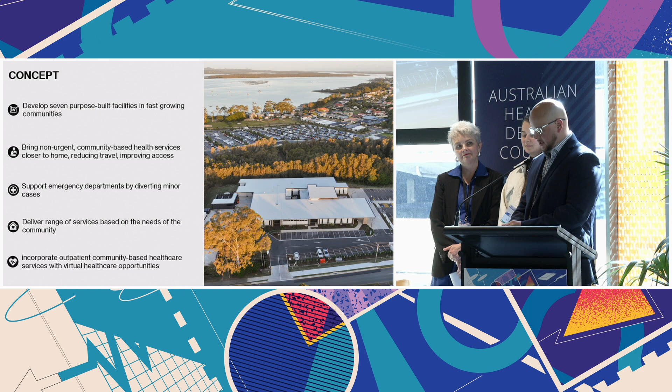Satellite Health Centres was originally a 2021 state budget announcement of the previous government, formally announced as a satellite hospital program, ultimately to deliver a series of ambulatory facilities to ease the burden on existing acute care hospital facilities across southeast Queensland. The program sought to roll out ambulatory facilities in growing communities, locate them close to home, reduce pressure on emergency departments through diversion of lower complexity presentations, align service offerings to those communities, and where possible embrace opportunities to integrate outpatient community-based healthcare and virtual care models.

So, as stated in the previous slide, the satellite health centres are an expansion of healthcare services. At a high level, they provided local communities with minor injury and illness clinics, medical imaging and diagnostics, and additional referral-based outpatient services. We'll go into more detail about the service mix later in the presentation.

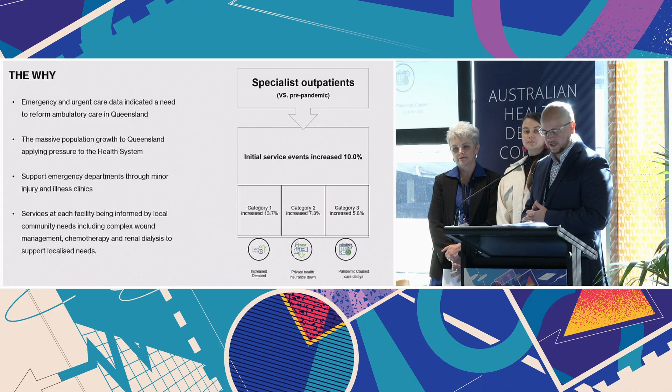So on this basis, it required a complex ecosystem in order to roll out the projects, and multi-agency engagement was essential.

To touch on a couple of points here, the program board was established by Queensland Health and included Queensland Treasury, Premier and Cabinet, Public Works, State Development, and the 4 hospital and health services, in order to oversee the planning and delivery of the program and the specifics of the projects themselves.

There was also an interagency working group set up for cross-government coordination with those same agencies, particularly because of the accelerated nature of the requirements.

To give an idea, land searches, selections and transactions had to be completed in weeks rather than months. Planning approvals under ministerial infrastructure designations, a process which in many instances could take up to a year, were required to be completed in months.

And business case development, design, cost modelling, and program-level managing contractor engagement were also required to be undertaken concurrently while the sites and planning approvals were being locked down.

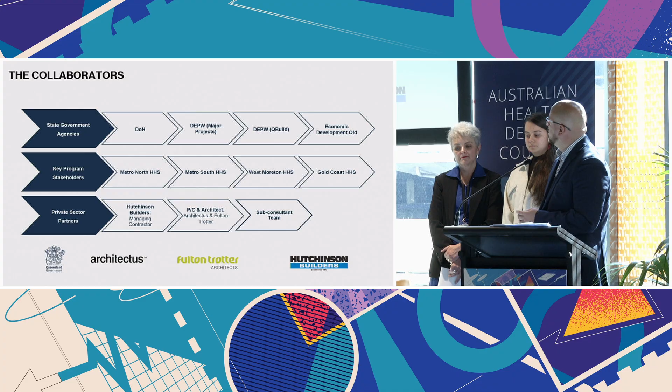So I'm going to talk a little bit about the locations. All 7 centres were located in southeast Queensland, an area of huge population growth. The locations were across 4 hospital and health services, as Todd mentioned, and across various traditional owner groups — the Kabi people to the north, and the Turrbal and Jagera people to the south. The communities and cohorts these centres are located in are all quite different.

So this is probably a good time to talk about the brief. Being a program of work, the brief was for a high degree of standardisation — these facilities are all going to be the same. So we've got some common themes with the previous presentation. But because of differences in the HHSs, the locations, and the communities they serve, they were also necessarily different. And as we talk more about the outcomes, you'll see these facilities are the same but different.

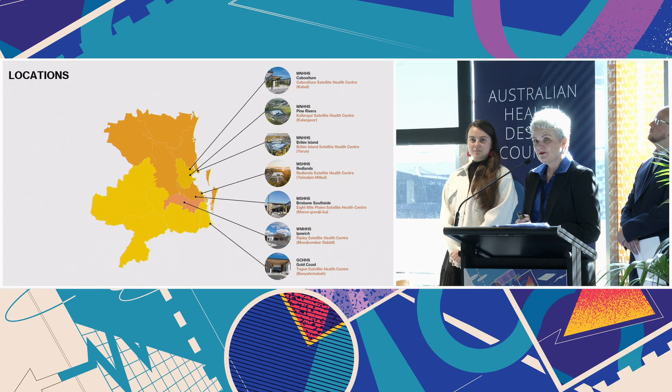In terms of the locations, one of the key things was that they had to be located in proximity to the major hospitals. Being satellite centres, they're linked very closely to major hospitals, and with some of our facilities, they're actually linked to a couple of major hospitals. This really informed the service offerings at each of the centres, and as we got into the detailed design, it also resulted in differences in how the same service might function in each of the centres.

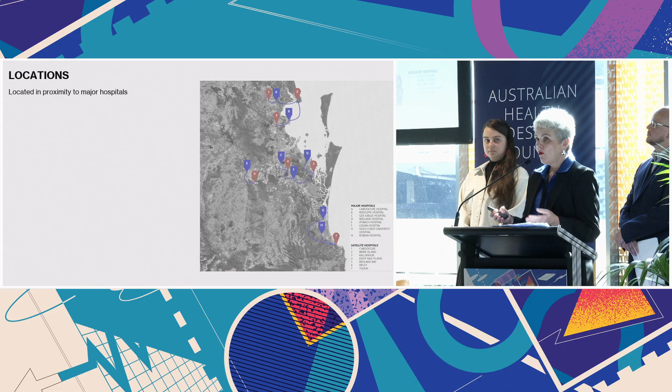In terms of the communities, it's probably worth outlining a little bit more about the differences. One of our facilities is located at Bribie Island, which is a very popular retirement destination, so it has an older cohort and community. Another facility is located at Ripley, in the west out towards Ipswich. This is a newly developed area with affordable housing that attracts young families. Our Redlands facility services the mainland Redlands community, but also the Moreton Bay Island community. So all quite different cohorts and communities with different requirements.

Continuing on with the theme of same but different, as Todd mentioned, this program happened really fast, so we were undertaking land acquisition at the same time as the business case and concept design. We undertook many test fits on multiple sites, but these are the 7 sites where the facilities have been delivered. As you can see, they're all quite different in their configuration, and they all have quite different contexts. They're all in the suburbs.

That was a key part of the satellite program, but they're quite different suburban contexts. They have all the same elements, all the same puzzle pieces, but the puzzle pieces all fit quite differently in terms of the site planning. They all have a similar facility, same number of car parks, similar plant, but access to the site is quite different. Some of the sites are flat in terms of topography, some have very significant slopes of 14 metres across the site. They all have different proximity to things like creeks, train stations, airports, cliff faces. So there were all sorts of site challenges that had to be reflected in the site planning.

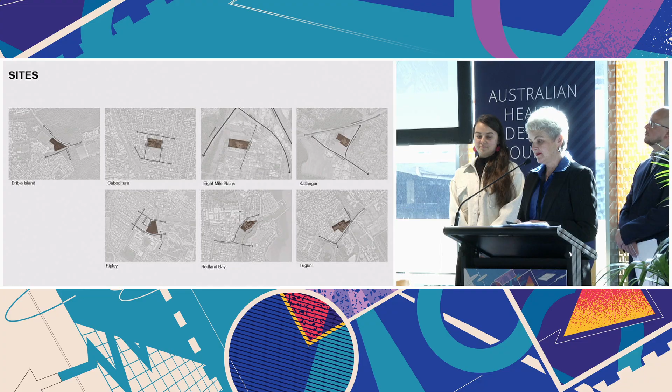With that fast program, we had to have a really clear structure of how we were going to drive that consistency across the program, but also respond to the differences across each of the sites. Decisions had to be made really quickly. So we had a regular cadence of meetings, with executive user group meetings attended by all 4 HHSs as well as HIQ and Public Works Department. The design team had a key role in attending all of those to ensure that consistency agreed on at that EUG level flowed down to the project user group meetings that occurred with each HHS quite separately.

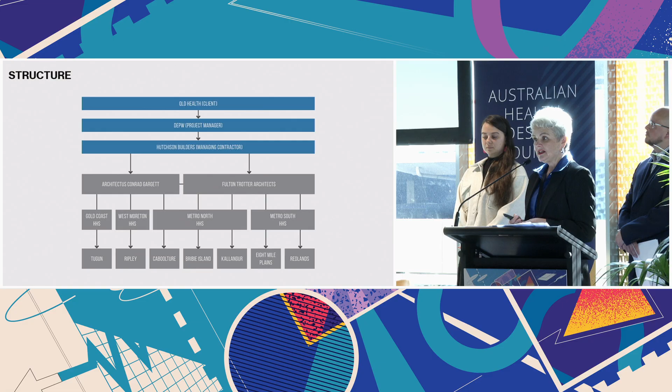The design team had a site lead for each of the sites, which is where we really drilled down into that detailed design with the clinicians at each of the major hospitals and within each of the HHSs. This flowed through to the health service offerings. The government election commitment was to deliver minor injury and illness clinics and outpatient services across all 7 centres, and this also involved medical imaging across all 7 sites. But then there were different health service offerings depending on the HHS needs and the major hospitals. In some cases, it was medical day, offering chemotherapy and infusions. In others, it was renal services or oral health.

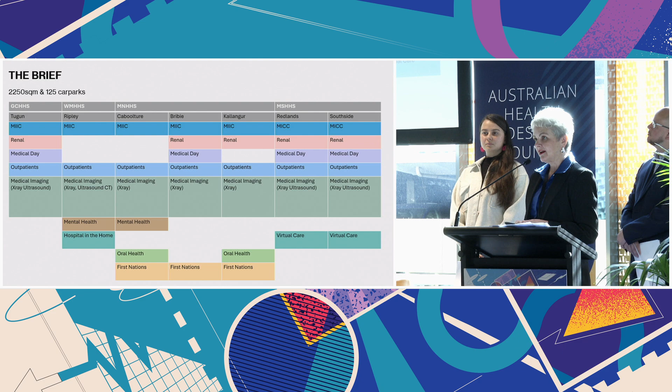This matrix gives you a pretty good idea of the different mix across the 7 centres. In terms of being the same, they all had the very same compact GFA of 2,250 square metres. But within that space, we were delivering different service offerings. You'll see in the blue there, they all had the minor injuries and outpatients, medical imaging, but then they had quite a different mix. No 2 centres were exactly the same, and even within each of those services, there were slight differences. So some services had renal chairs of 12 and others 9. Subtle differences the whole way along.

Okay, so while we didn't have the budget of any Saudi princes on this project, we absolutely did go into it with the idea of creating value with what we had. Something that was really important to us was to create a community space, and our aspiration and concept really revolved around that idea of community.

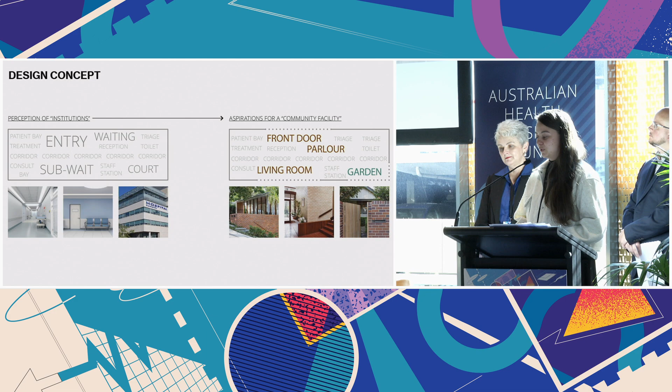We had guiding principles themed around journey, nature, community focus, and local context, and through that we had key strategies. These were important because we were designing across multiple architecture firms with many different stakeholders, with a builder as the client, and that allowed us to have alignment on the key outcomes. The concept of removing the perception of an institutionalised space came up a lot, focusing on the idea of a community facility, the front door, the journey through the building, and creating a living room feeling throughout the spaces.

So nothing groundbreaking or new here for probably most of you in the room. However, these were really simple diagrams we could keep coming back to, and whenever things were up for discussion or debate, we were always able to return to these design keys. Some of the key ones there are around the central courtyards.

All 7 sites ended up with a central courtyard with different functions in the end. We have a concept of warm handovers, something really important that we were able to fight for throughout the whole process, and we'll go through the outcome shortly. We also had keys around our form and envelope, so the H-plan, allowing light into the spaces, and the idea of local materiality and conceptual references.

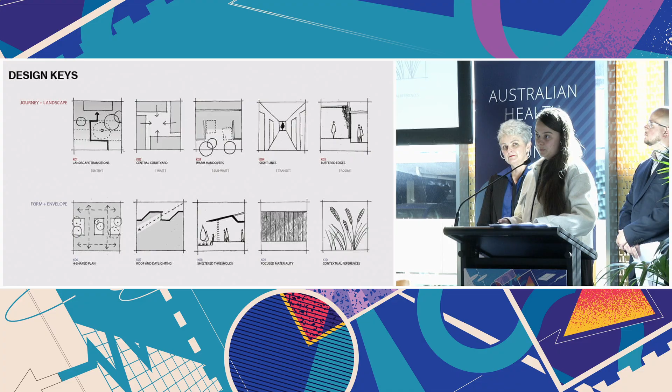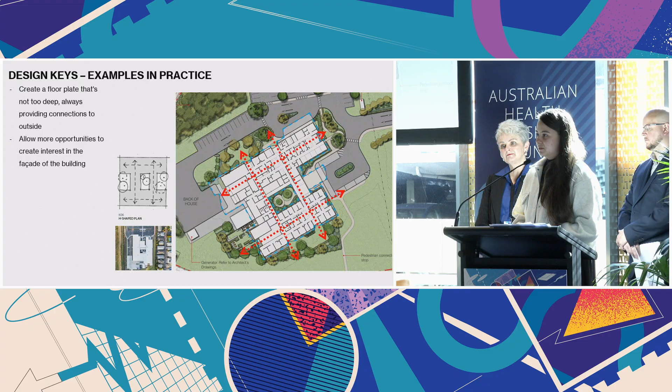Landscape design was done by Dun & Moran Landscape, so they were a really important part of the process as well. The H-plan, in practice, is nothing new, but surprisingly very important to keep coming back to as a key we wanted throughout the whole project. By not having a floor plate that's too deep, we're always ensuring connection to outside and to natural light, which we all know is really important. It also allowed for a little more interest in the facade, with some depth to it.

In practice, the sub-waits were our warm handovers, again a design key from early on that we were able to keep bringing back to its importance. This meant reducing large waiting areas into warm handovers, alluding to that Disney model with a bit of distraction through views outside and materiality, making you feel like you're in more of a living room than an institutionalised space.

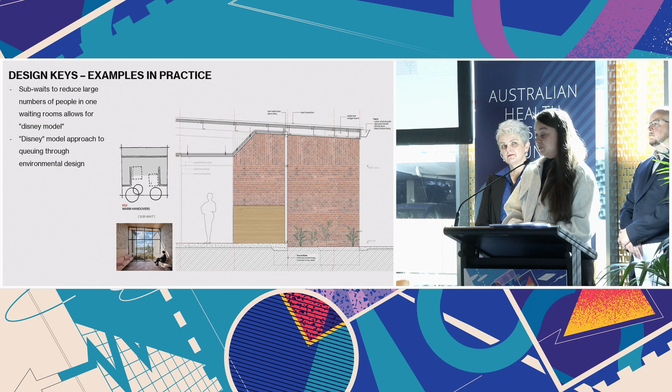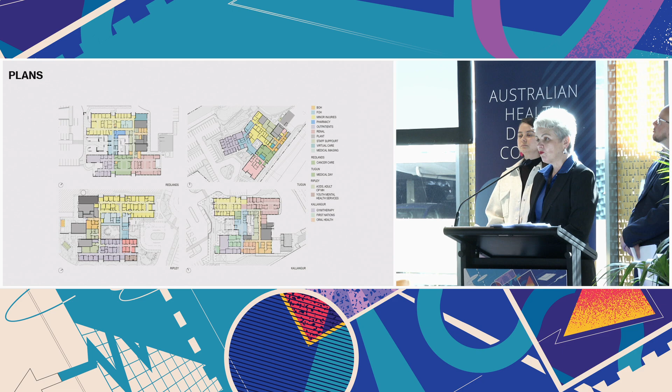Building a bit more on the H-plan idea, we had an H-plan at all of the centres, and the patient journey was remarkably similar across all 7 centres: patients arriving at the car park, entering a beautifully landscaped shaded entry courtyard, arriving at the front of house waiting reception area, and then being directed to clinical services in each wing of the H-plan, with a courtyard behind reception and back of house behind that. The H-plan was very effective for efficient circulation — with our very compact GFA, we tried to maximize clinical space and be as clever as we could with circulation. It was also effective for wayfinding, with no area very far from that front of house space.

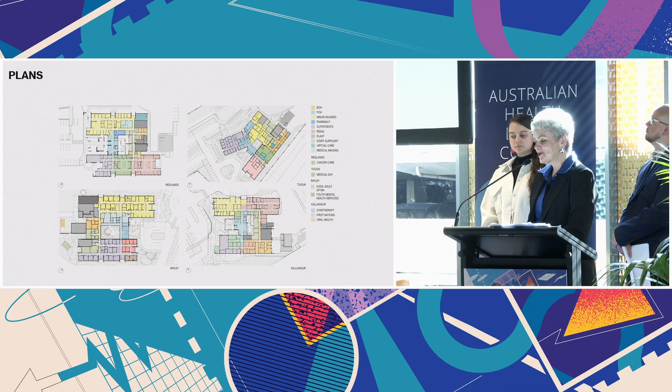You'll see these are 4 of the H-plans from 4 of our sites, and there are necessarily some differences — the different health services led to variations in the H-plan, as did the actual site planning. In particular, Tugun in the top right-hand side: the configuration of the site meant we had to crank one arm of the H-plan, so same but different.

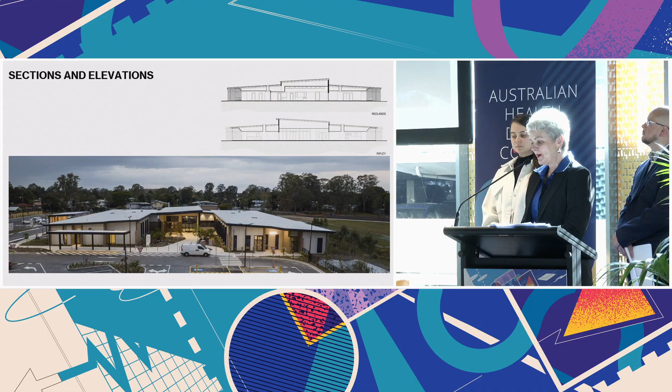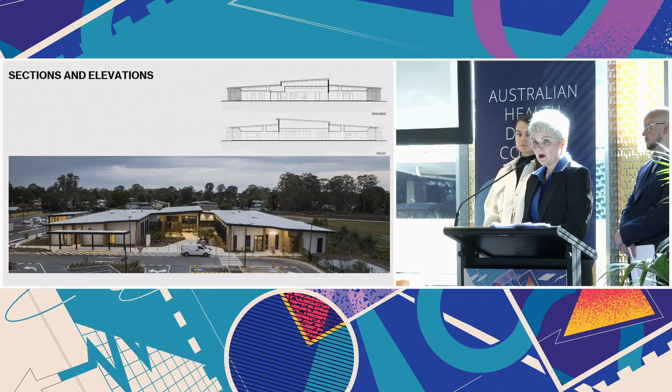I'm not going to spend too long on this one, but in terms of the built form, very simple structures to help us manage budget. Single level, simple skillion roof, which settled really well into the suburban context. We also brought in suburban materials, brickwork and timber, which fitted well with the surrounding residential development.

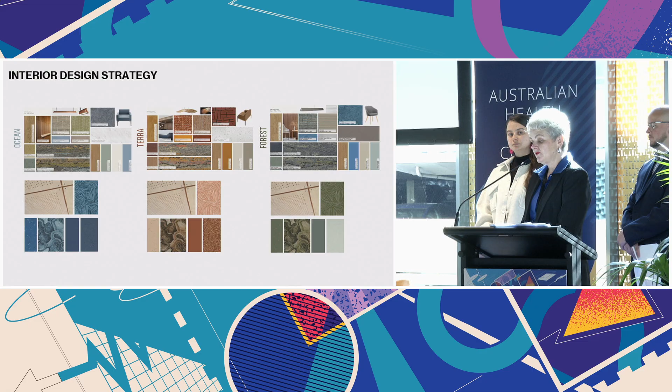In terms of our interior design strategy, we had the same palette of materials across all 7 sites. I've already mentioned the warmth of the face brickwork and timber, reinforcing that non-clinical feel. But then we had a different colour palette depending on where the centres were located. You can see the 3 different schemes selected for the 7 centres depending on whether they're near the ocean or the bush.

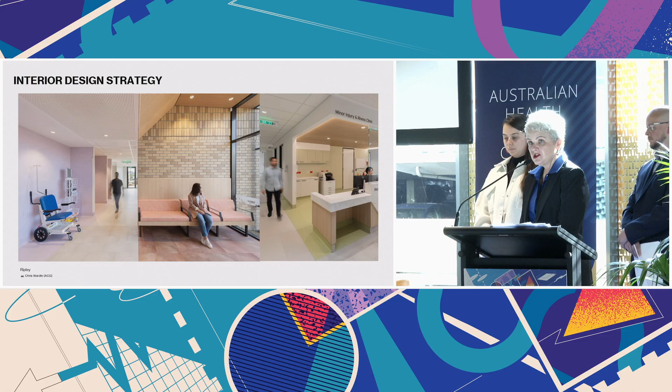You'll see some images here. One of our design strategies was to really have the flow of the outdoors indoors, connecting the landscaping to the interiors, with materials flowing from outside to inside. That's one of the warm handover waiting areas in the centre, with brickwork and timber flowing through. We also had different colours for the different health service areas to support wayfinding, with timber portals as you transition from one health service to another.

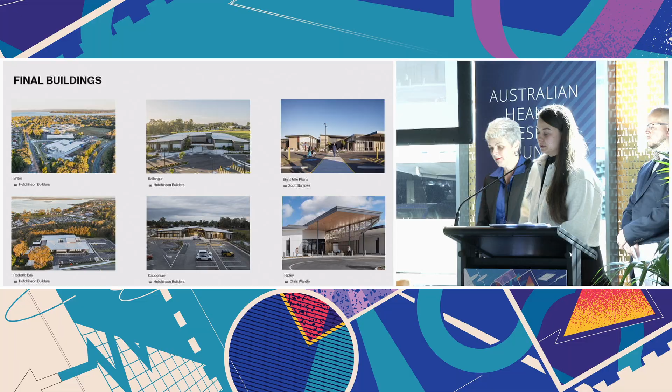Just a quick snapshot of the final buildings, 6 of them. We're really just trying to illustrate that they are community facilities, embedded within quite a suburban environment. This is showing you that the scale is very low compared to perhaps what you might have originally thought when you heard about it being called a sort of satellite hospital, which it isn't. So really just trying to show the scale and the simplicity.

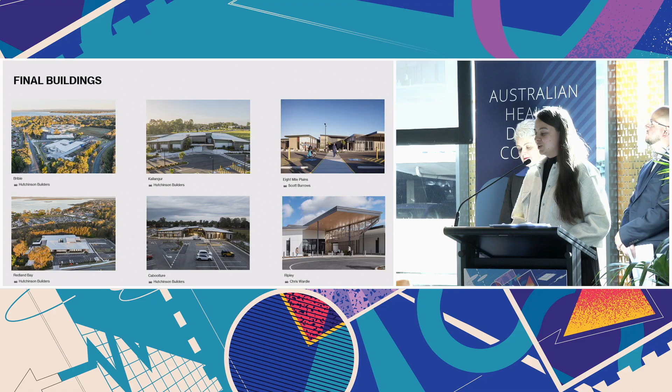You get the idea of how they are all similar, trying to make it feel a lot more welcoming than a large space. Looking through the interiors, again these are the 6 different sites, so you can start to see how similar materials are used throughout similar spaces, with slightly different colour variations and application of material as well.

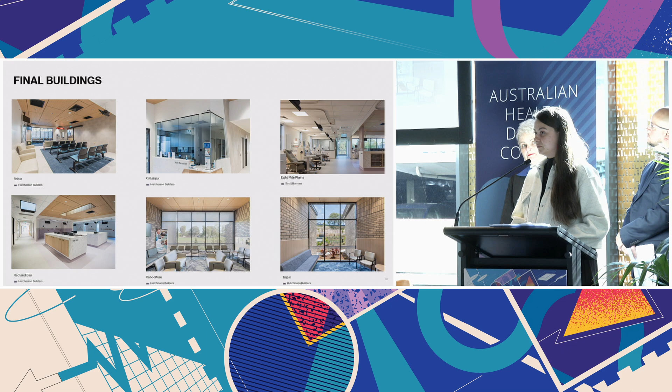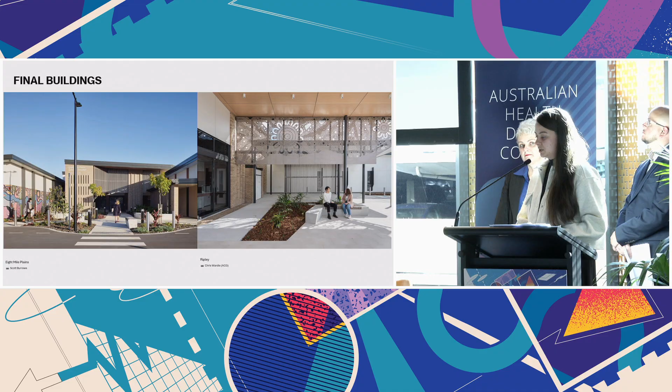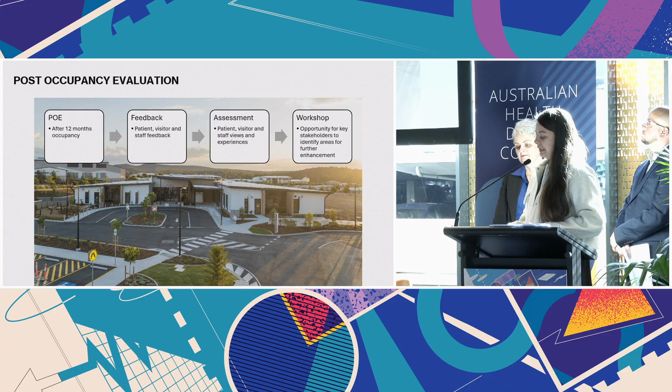Now, post-occupancy evaluation. This is Dr. Wai's work, so if you have questions, hold them for her later—I'm sure she will be more than happy to talk to you about it in great detail. But I will touch on some of the findings. Architectus collaborated with West Moreton Hospital and Health Service to conduct a POE 12 months after occupancy. The main purpose was to gain feedback through specific questions, and then an assessment of the patient, visitor and staff views and experiences was undertaken, as well as a workshop which created an opportunity for key stakeholders to identify areas for further enhancements. A really important part of the process.

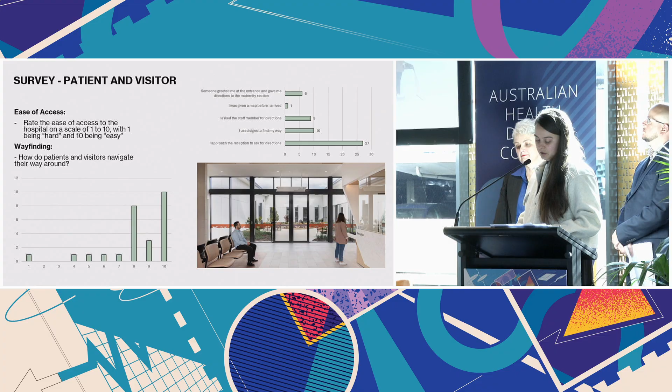I'm just going to touch on a couple of questions, which hopefully relate to some of the things we mentioned earlier. Through the patient and visitor survey, with around 32 participants, they were asked a series of questions, one of which asked them to rate the ease of access to the hospital on a scale of 1 to 10, with 1 being hard and 10 being easy. The majority of people, as you can see in that bar graph at the bottom, found it pretty easy to navigate to the site. I just called it a hospital—it's not a hospital.

So that's really good, kind of obvious they're built within the community, so probably nothing too unexpected there. When asked how patients and visitors navigate their way around, the majority of respondents would approach the reception desk before moving on to where they needed to be in the space.

The spaces were designed that way, so that also makes a lot of sense. Secondary to approaching reception, they would then move on to using the signage throughout the building to find their way around, and then the waiting areas and interior of the space—really trying to understand the perception of the interior environment.

We spoke a lot about creating a warm, welcoming environment, so did we actually do that, or is that just something we like to talk about? Turns out that the majority of respondents actually did express contentment with the aesthetics, specifically appreciating the view to outside—that was a really important response we collected. 78% of respondents felt that the colour and design of the space made them feel comfortable. Have a chat with Wai later, I'm sure she'll be happy to go through more of that.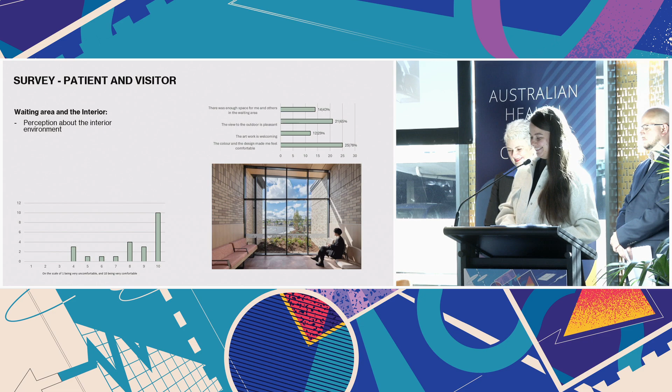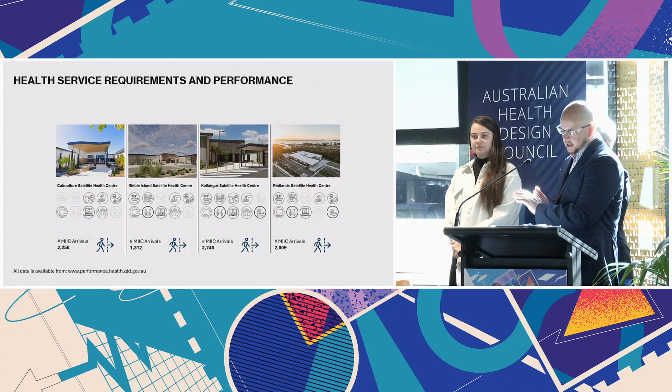So, the performance. In February '24, prior to the complete rollout of the program, there were some public announcements from early stage data which actually showed that pressures on some of Queensland's busiest emergency departments had eased since the introduction of these satellite facilities.

Further to the POE outcomes, there's also various instances of communication from staff and consumers alike which provide positive indications regarding the role of these facilities in the system and the communities they're located in.

As part of the rollout there were changes as we progressed, which happens with a lot of these projects. Particularly with the Ripley site, halfway through they'd identified that they were going to co-locate a 90-bed subacute facility right next to the satellite and needed to connect it, so some adjustments were made there.

And certainly from a Metro South perspective, in order to support the waiting room experience, a containerised coffee cart was jammed in at late stage construction to make sure we could provide a decent coffee offering. So there have been some lessons learned along the way.

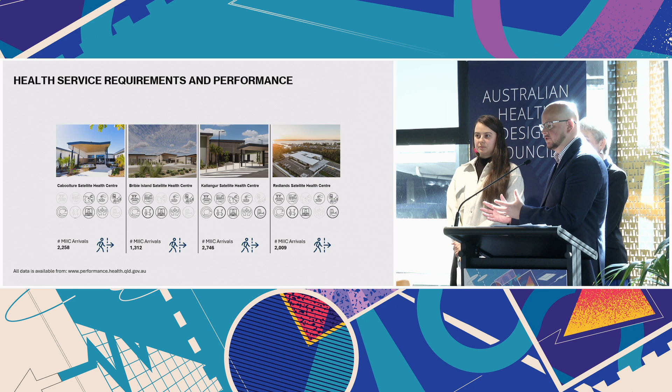Just quickly before the next slide, you'll notice there are some numbers at the bottom here of MIIC arrivals—those are monthly figures, I think that was April. That information is actually available publicly, on the Queensland Health website under our performance, where all the information around each of these facilities and how they're performing, at least at a high level summary, is available.

So Queensland Health is committed to ensuring the satellite health centres are achieving the aim of providing healthcare closer to home and easing pressure on emergency departments.

In alignment with the Queensland Treasury Project Assurance Framework, the process for infrastructure projects is that a benefits realisation would be run, which will certainly include some of those POE outcomes. The department is in the process of undertaking evaluation now to understand if they are doing exactly what they aimed to do, via a deep dive into data, to inform the next round of planning and any further ambulatory facilities we're looking to do in the same manner.